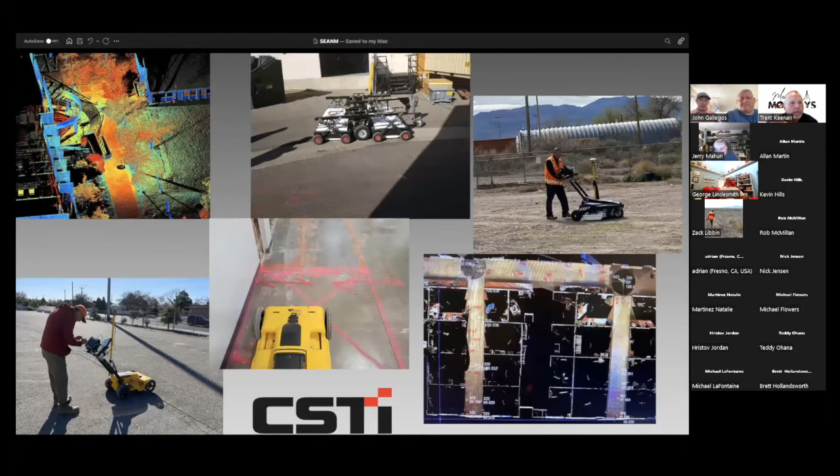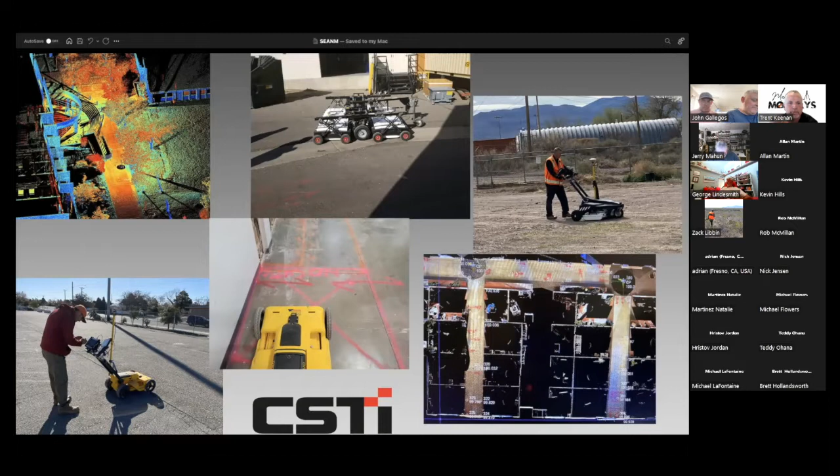Here's a couple of photos to get you warmed up. Some of you may be familiar with some of these tools or scenes. On the top left, we've got a nice LiDAR model. In the middle, our Stream EM GPR, which can be pulled by a vehicle. Then our Stream C on the top right, a nice tool that can get around and cover a lot of area. On the bottom right, a floor flatness scan we did in a building, and in the middle more GPR, with another GPR sensor on the bottom left. So these are some of the tools we use on a daily basis.

Just a brief on CSTI. We've been around since 2007 and started out with a background in construction. John has how many years of construction? Since 1996. I've been with John since 2012, 2013 I should say. With a background in construction and doing a lot of that type of work, it helped prepare us for what was going to come next in our company, which was going to be LiDAR scanning and GPR.

When you have a little bit of experience about how things get installed, it kind of helps you reverse engineer everything and think about how you could provide this information and data in a manner that's going to be beneficial to the end user.

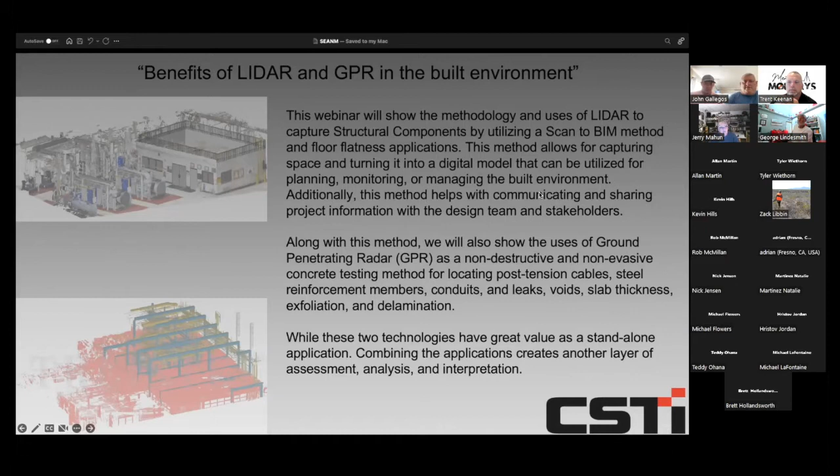Okay, so what is GPR? I'm sure everyone has heard about GPR, and GPR is simply just ground penetrating radar, where we're injecting electromagnetic waves at a specific frequency into the ground. As it creates a return, and the speed of the return, it creates this beautiful bunch of fuzzy looking lines that takes you about 100 years to understand what they mean. There's a lot that goes into GPR as far as conditions and physics, and everything that's far and few between. We could have an entire topic about GPR and what it does.

What I can say about it is it's a specific tool in a process that allows us to analyze specific things and features in the ground, identify what anomalies are supposed to be there and what are not. We take the two, try to marry the information, and then make the assumption of what that object is in the ground.

It gives us a repeatable sense of redundancy in terms of the information, such as looking at the rebar spacing, and then we check the plans and say, okay, yeah, this makes sense that they spaced it evenly this amount. It's used for analysis. It provides a bunch of different applications for a bunch of different things, but specifically we're talking about structural.

Some of the other things that's beautiful about GPR is it helps us look at certain conditions of the concrete. It allows us to see the health of the concrete, whether it's old, whether there's any type of degradation, if there's any type of delamination or exfoliation that happens when the rebar gets water intrusion and starts to rust, causing a chemical reaction.

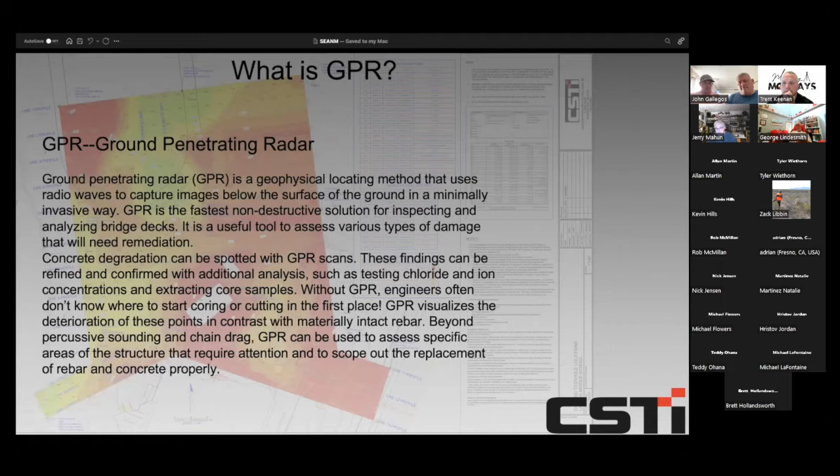Some of the applications in terms of how we apply GPR and the studies that we utilize is concrete inspections. That means anything like the old DOT methods of dragging chains over a bridge deck to see if it makes a hollow sound, or tapping to see if it's hollow, which has a specific pinging sound, or like a CMU wall in a jail.

You want to know which ones are filled, which ones are solid, and you can kind of tell. They're using sound waves, and waves from the hammer, to understand that the pinging is going to have a specific sound.

The old method the DOT used to utilize, or probably still do, is dragging a chain, and when they get a hollow sounding signature back, that's obviously a problem area in the deck. But nothing like GPR is going to give you a more comprehensive picture, even though it takes a lot of dense passes to come up with that type of analysis.

It's a wonderful tool to give you a great view of what's going on, and we'll show that slide here in a second. Again, we talked about degradation, delamination, and of course any under slab voids. A lot of times we've been in situations where there were underwater leaks for long periods of time, and as water goes in the slab with hydraulic pressure, it goes the path of least resistance, so your assumption that it's over there could actually be originating from somewhere else. That helps us narrow it down.

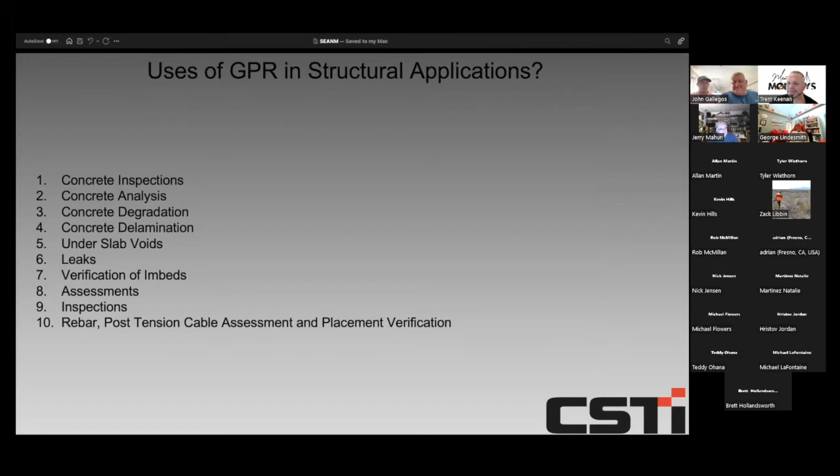Any type of assessment you can think of, a lot of forensics goes into that assessment and inspection. And of course, rebar, post-tension cables, and placement verification is huge, because a lot of times when they're coring, we want to make sure they're not coring through a PT cable that has a 10,000 PSI strand. If it's pulled right, that thing's just going to kick out and cut someone in half. So it's really important to have this tool if you're in the construction industry.

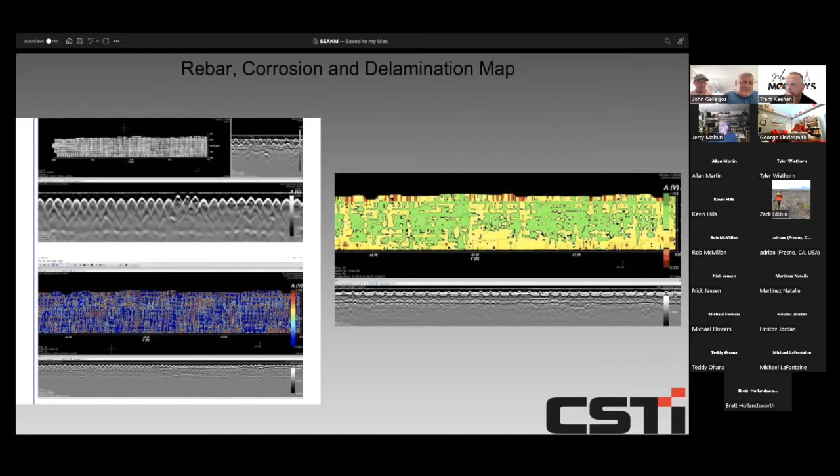The one on the bottom left is just a straight tomography, but you can see the lines of the rebar. When you see bigger signatures with higher red areas in between, that tells you where it's starting to corrode and water is intruding. It's starting to get to the point where it's spreading from rebar to rebar, creating separation because of the chemical reaction with rust - that's exfoliation. That's when the slab starts to split and the rebar mat starts to go.

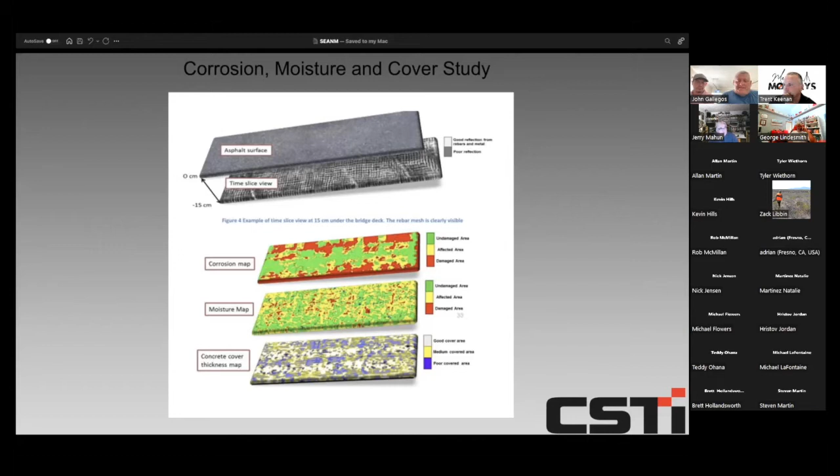So here's another one that we did. I think this is the old NMSU bridge before they knocked it down out there at exit 1. We happened to do this study right after a survey, after it rained the night before. People always ask if rain is the enemy for GPR, and it is, but only when it gets oversaturated. In this case, we had a lot of rain, and it actually gave us better resolution because of the timing.

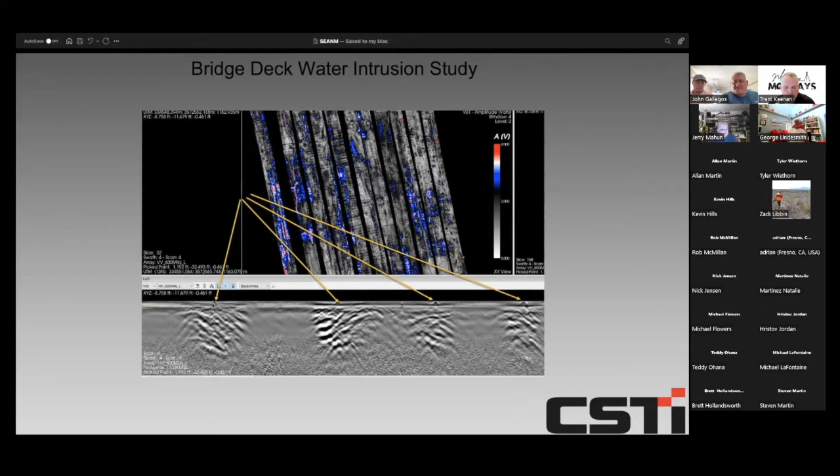Especially in existing buildings or places you don't have great information on, because at the end of the day you're just shooting in the dark. This is a good example - there's no such thing as luck. That guy was just gambling with his life. Thank God they recognized that, and after that day they hired a full-time GPR technician. So that gives you an idea why it's important in a lot of ways.

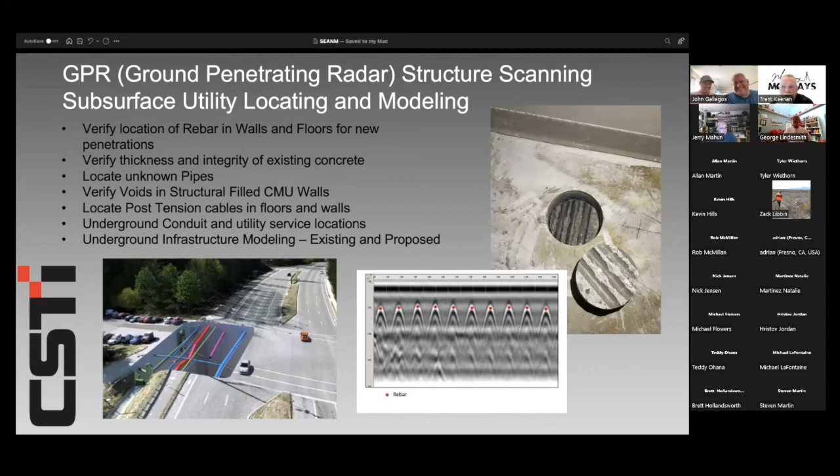Okay, so what is LiDAR? I know most are probably familiar with it, but let me give some background. It's a great technology that's been around a while, but is starting to be more utilized today. In the last 5 years I've really seen it used more and actually requested - sometimes we use it internally to produce deliverables, but sometimes people ask for it specifically, maybe just wanting a point cloud file, which combines all the data collected from a LiDAR data capture.

There's a lot of different applications that we've been using it for so far. Of course, surveying and engineering, doing design surveys, combining data sets with mobile and aerial is a huge value. Looking at evaluation and concepts. Of course, with highways, when you can drive down the road and be collecting all this detailed information, it's a huge benefit. Of course, mines and quarries, being able to scan something and bring it back to the office, which we refer to as virtual surveying. That's pretty awesome too, when you can bring that model into the office and be able to work on it. Looking at the built environment like we're discussing today, and structural applications.

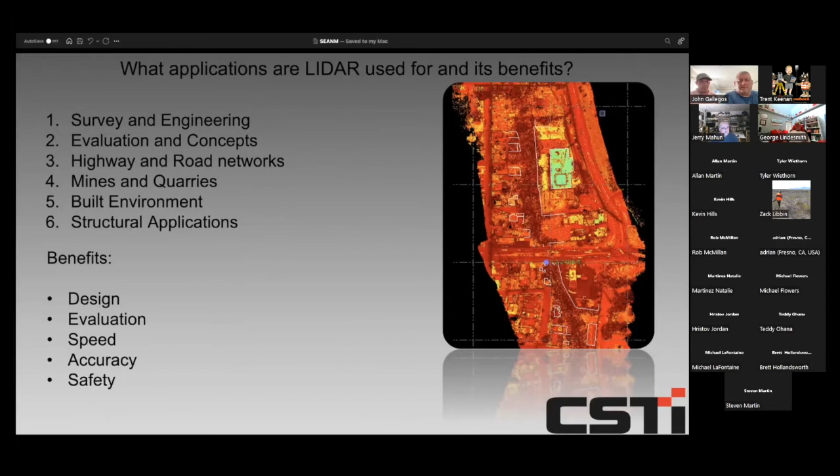Here's a little bit about terrestrial. I'm not working for Trimble, I promise, but the SX10's been pretty awesome, a tool to be able to set up, especially just for an everyday surveyor type scanner, because you can set up on your control and scan away. You don't have to worry about putting up a bunch of targets, and everything comes in really nice.

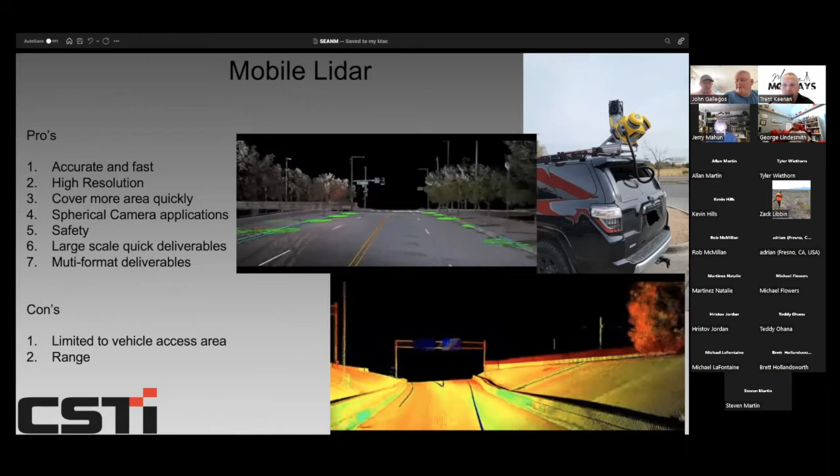Going into mobile LiDAR, like I mentioned, it's nice when you could drive 40, 50 miles down the road and be able to be collecting some tremendous data. Being able to, if you forgot something or the client wanted something additional, they wanted the trees after all, you don't have to go back. It's nice to have that. Even as historical information from a city, being able to archive the information could be very valuable for them. From a safety aspect, I know I played Frogger plenty of times in my day, but definitely not something that I would want to put our team in a situation like that. So we really like the safety benefits that we get from using mobile LiDAR.

Aerial LiDAR, again, you can collect some pretty large data sets with the platforms. One of the benefits of LiDAR is that it's able to penetrate the vegetation, which is very different from photogrammetry, UAV photogrammetry, where your images, your model is going to have the tops of trees and everything, and it's a little harder to classify and clear out. So we lean on the aerial LiDAR to be able to give us a nice surface even through the vegetation. And so it's been a great tool.

But sometimes you can have different restrictions. Maybe you're not able to fly in a certain area, or it takes time to even get those permissions. And it's not something you can always just say, hey, I'm going to schedule that for this Thursday, because there's steps you have to follow in order to do that. And so it takes a little bit more coordination to get to that point.

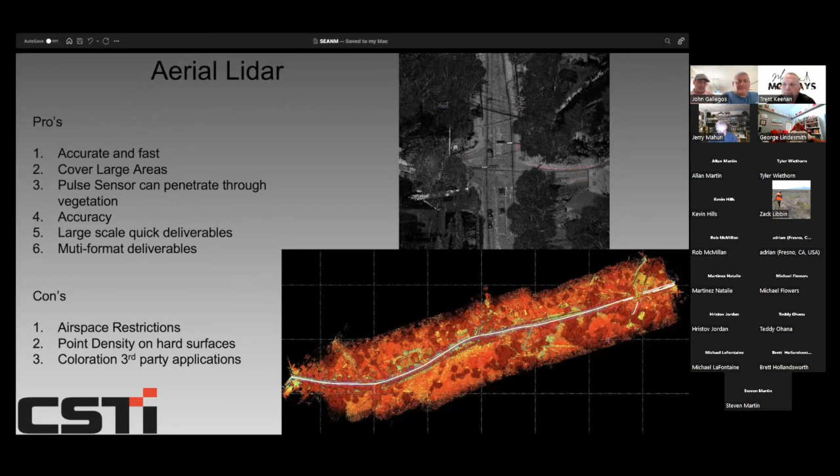And then, looking at some workflows and different software that we're utilizing that I've mentioned, and also different deliverable file types.

So the most important thing is access and planning. Of course, the acquisition - it's always going to be the right tool for the right job. You have to assess it, make sure that you put down your panels and your targets everywhere they need to go.

A lot of times it's a combination of one or all of the acquisition methods that you need to utilize. And important is registration - being able to get all the data sets to meet a quality of relative accuracy in terms of how good that information is fitting, making sure it meets the specification.

Of course, the georeferencing could be placed on whatever the constrained values of the project are, and whatever the criteria is to meet that. And then the next part is extraction and deliverables. At the end of the day, we get to give it to the GIS guys to go out there and put a bunch more data on their website and do more analysis.

So it's probably going to bog down your machine, but hey, that's what they're all about. And then again, some of the registration and trajectory software - some of the best in the game - you guys have probably already seen. The extraction, I know there's a ton of them out there. These are the ones that we use.

And it's not a function of just one - you have to use a combination of multiple ones, because each one has specific tasks, being able to look through information.

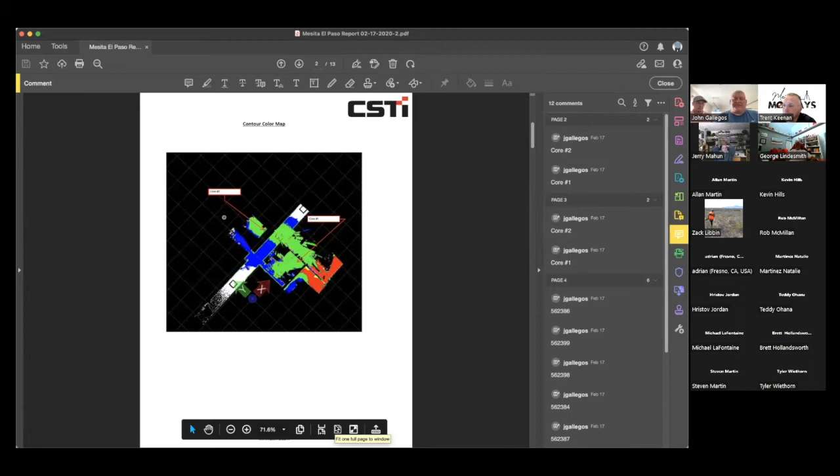And of course, we'll get to the cross sections later, but this gives an idea of a telltale - okay, this is where I need to cut my sections. It gives me an idea of where it is on the floor plan, so that we can go through and create the reports, so the structural engineer has an idea of what's going on.

So on a plane deviation map, the bluer the color, the higher it sits below, and the red colors, it's going to sit above the plane. So there's quite a bit of difference, about 3 inches, anywhere from 0 to 3 inches when you get to that point. And I'll get into the cross section.

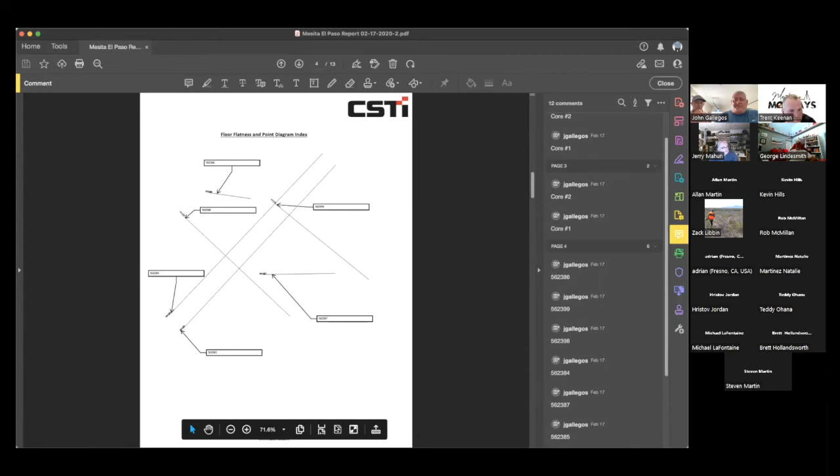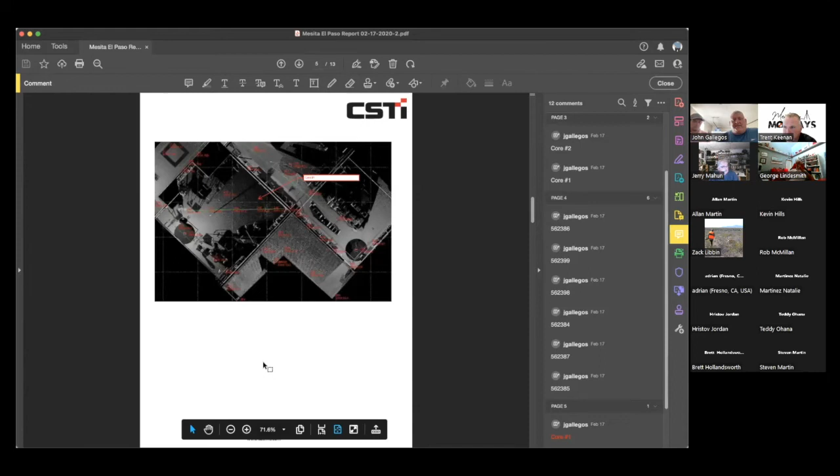This is more of a diagram of where we cut the sections and did the GPR, but we're using the analysis tools in TopoDot to come up with this diagram. These are the random points we sample, where we try to create redundancy by extracting the actual points themselves. You can see some elevations in there that give us a data set where we're taking hard measurements to make sure we're getting these cross sections, and that's how we're able to tell from the model we're extracting the cross sections when we do the analysis and the FF and FL reports.

So when we get into those cross sections, you can see that those cross sections are on the floor. On the left side, it gives you an index of 0, and the floor is heaving as much as 2.5 inches over a distance of 90 feet. As you get to the bottom, it's kind of doing the same. So that's identifying to him that it's heaving in a specific spot, so he knows it's problematic. And obviously the structure is a living and breathing thing, so it's doing some things because there are things that are not supposed to be there.

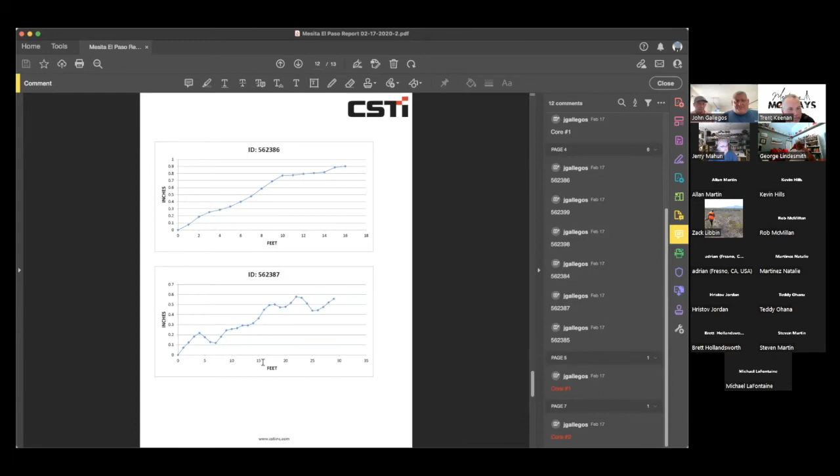So as we get more and more, we have some stuff that goes from 0 to 1 inch. Again, on the bottom, 0 to 1/2 inch. And then we have some that really get kind of wacky in there.

At the end of the day, this gave them a pretty good analysis of what was going on in the building. So it allows them to apply a fix to the certain condition, because the survey was giving him signs of what was going on in the building, and it gave it to him in a geospatial position where he could actually go over there and say, okay, here's what it is, here's the plans. He modeled it, was able to come up with the fix, and they found what the problem was. It was just an underground leak, so they had to apply the fix so they can remediate the issue, and then it can no longer create an issue for the lifespan of the structure.

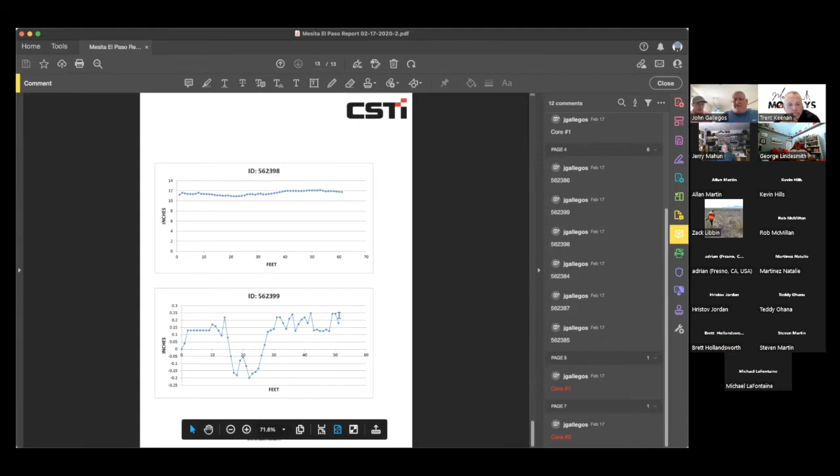And then also as a baseline, a lot of times we've got to be patient, we've got to start somewhere. Like just the other day, we did a laser scan of a CT scan room, and we were thinking that maybe the CT scan machine itself was too heavy for the floor. So we were going to run a floor flatness report on that, and then also go back in 6 months to do a comparison on any movement, like John mentioned, it's kind of a living, moving thing. So we're just trying to monitor that.

So the next thing we're getting into is scan to BIM. I know a lot of you understand what that means, but essentially we are going out there and doing a capture of the existing condition, and we're going to model it. The coin term they come up with now is we're creating a digital twin of the existing condition. And it's very important because it's up to us to be able to visualize and make these assumptions of what the structure is, what type of frames, what type of material.

There's so much metadata and so many things that can go into the development of these families, and the Revit model and families are just basically the templates, and everything applied to that has a ton of information, and those could be specific to a client. They could have a Revit template they want you to model it to, or there are some other things they utilize. It's just a matter of being able to identify what those are before you capture the survey.

Now, we pride ourselves on being able to put this in a geospatially accurate condition, because a lot of times the software kind of limits us to putting it in its own local software, so there's not the ability for us to create a condition as it was originally surveyed, which is the foundation of the design.

So we're able to overlay all those elements using the same coordinate system. It's a beautiful marriage when you can get them all on the same coordinate system that the survey initially established. It also allows other consultants to get on that same coordinate and control system, so they can overlay all this stuff to do analysis and anything they need. For stuff that might come down the road, at least we have one common system we're working off of, just trying to be a little proactive as far as that goes.

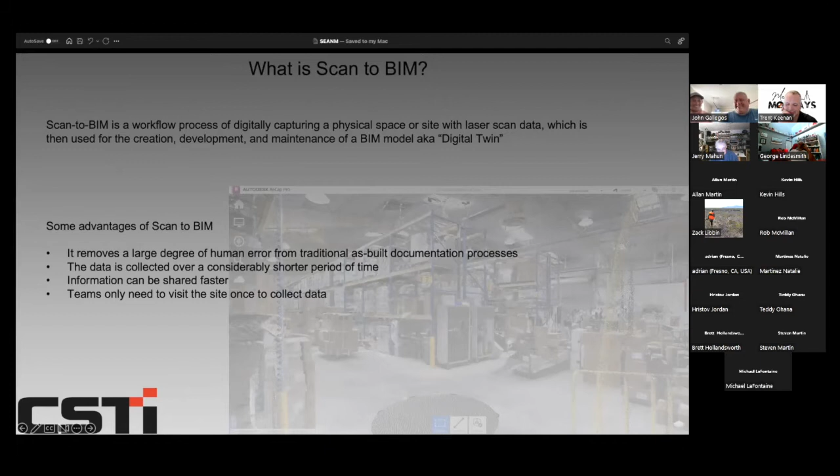And for anybody who's familiar with the BIM process, I'll let Dave take that over.

BIM stands for Building Information Modeling. Basically it's a tool that helps manage this whole process from design and planning, construction, and operations and maintenance. But it's a process that even in the initial design stages can be pretty valuable. Being able to translate a 3D plan onto a 2D piece of paper is always challenging for the contractors and those building it—interpreting that in a 2D world is very tough and can be very difficult.

So with BIM, we're actually able to look at a model of something. When things are designed and planned, that's one thing, but it could be built a whole different way—there may be changes, there's going to be addendums and change orders and things that happen. Through BIM, you're able to track all of this that's happening.

What's cool is there's something called BIM coordination. A BIM coordinator can work with all the subcontractors to make sure everything's being done in orderly fashion—so that a maintenance box won't be covered up by a water line, let's say, or some other utility, ensuring there's handhold space for that to occur. Sometimes we see those memes where somebody's trying to open an electric cabinet and can't because there's a curb in the way—it's just like these engineering faults. This helps minimize that.

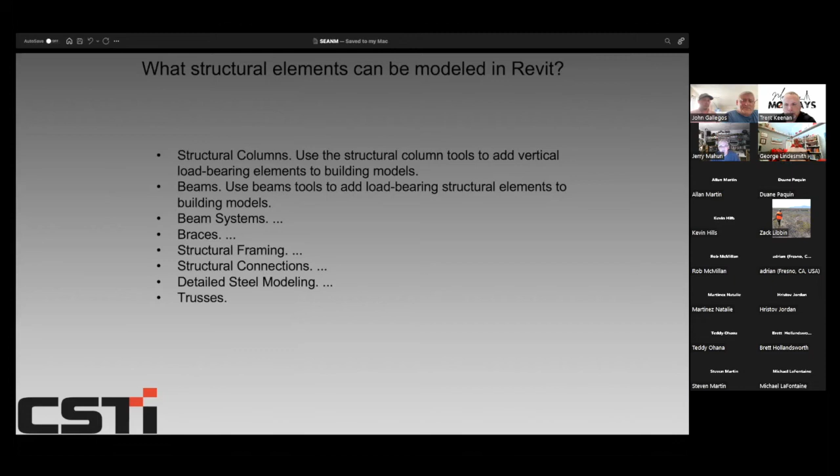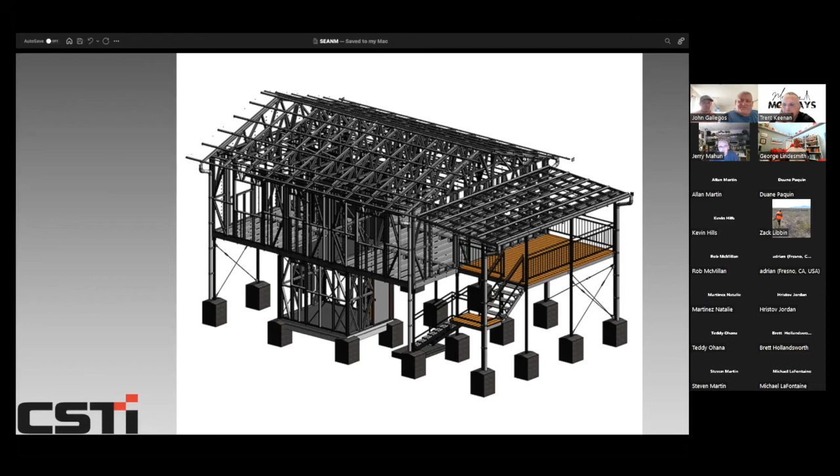So the structural engineer can make informed decisions, because in this specific case, they wanted to put heating and cooling units on the top, and they needed to make sure the moment frames were able to handle the load. So we had to get all these little details and model this to help in his decision.

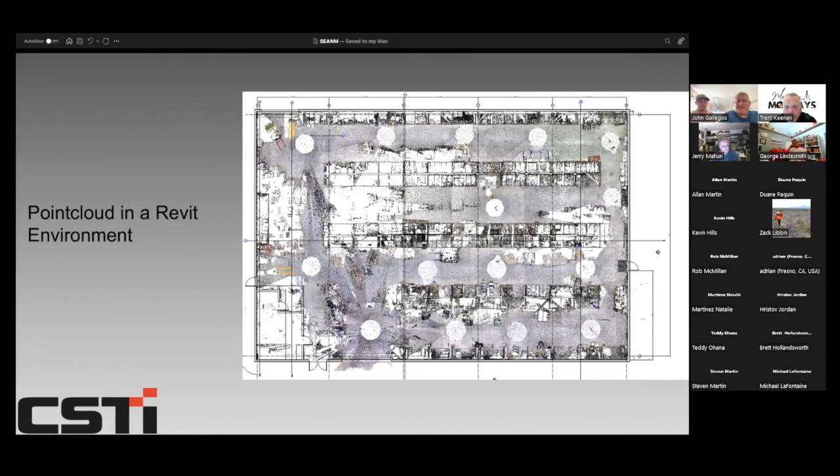He was able to even model all the other components, which were the structural bins, and know where that space is, because it's totally about utilizing the space and understanding what was there. The better information you have, the less assumptions you have to make.

It's not just eyeing it and going back to some field notes that could have been off plus or minus whatever. But at the end of the day, this is kind of what the finished product looks like when you know it's coming together as it should.

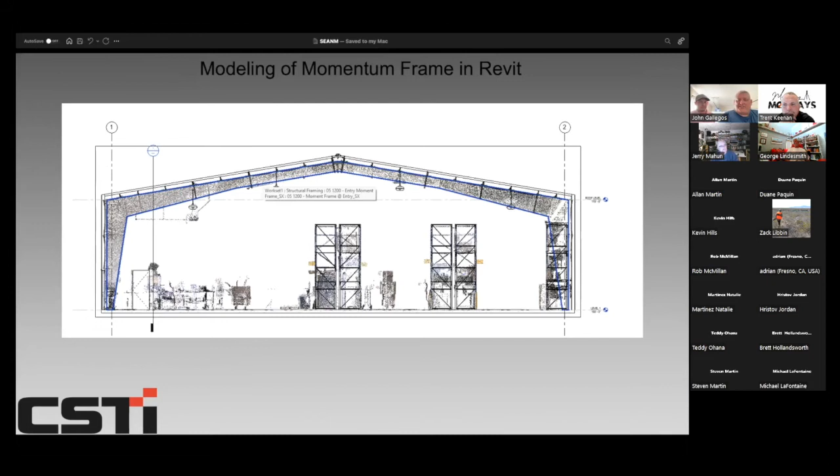On that one, what do you think the total man hours spent in the field and office was for what you put together there? 40 man hours to build the model, the digital twin, and probably a day in the field. So probably about a total of 50.

How much of the Revit side of it is automated? It's pretty automated. You just got to make sure that you have the right templates, and the architect or the engineer gives you the right information, and it gets put together pretty quickly. Once you have that established, it's just a matter of picking through the model and clicking, and it kind of is really automated.

We have an associate, his name's John as well, John Dillinger, and we wanted to see if he could join us today to add some of this because he really specializes in creating these models. So maybe for future Mentoring Mondays. He's totally knowledgeable. What's cool is that he's straddled the architectural world and the survey world, so he knows the best of both.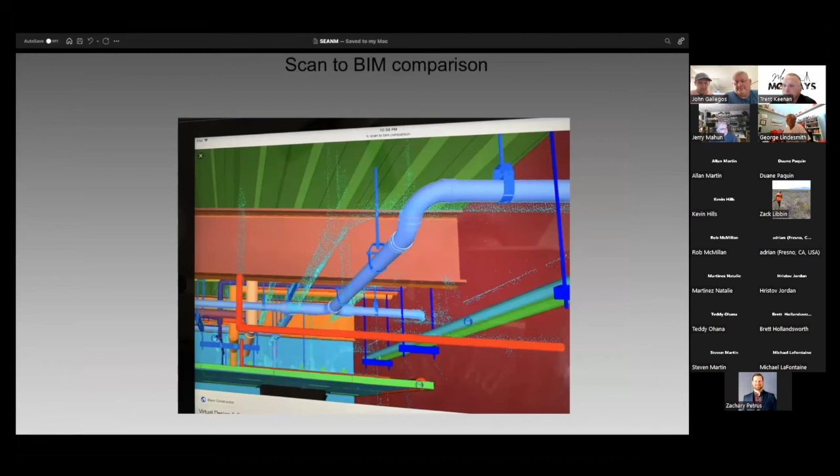So it's a nice little direct comparison tool that you can use. And then I think this was one of the last things, this steel report. Just give us a sec to set it up.

The one thing we never lose sight of is that we have to start thinking about how we're going to represent the information, even though we may not actively be doing it right now. We have a voice into how that information has to be represented in the next generation. We've got to set up the tools so they can follow in the footsteps of that information.

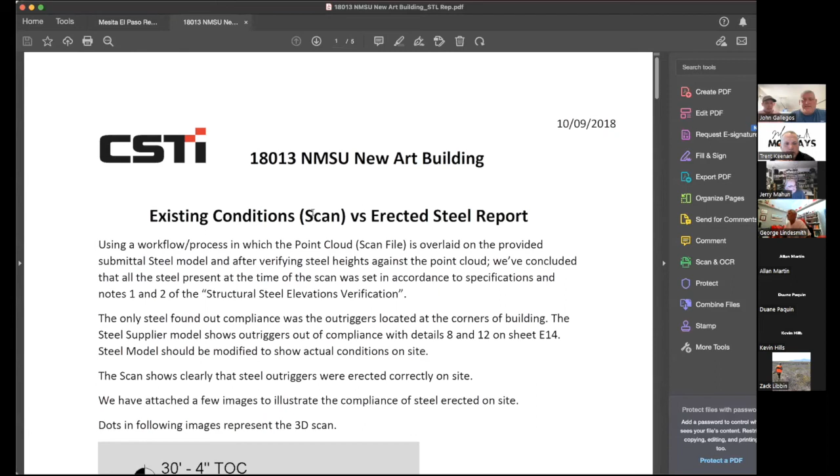So here's a report, this is a beam erection report, just letting us know what the build versus the scan looks like. And I'll let David go through the report.

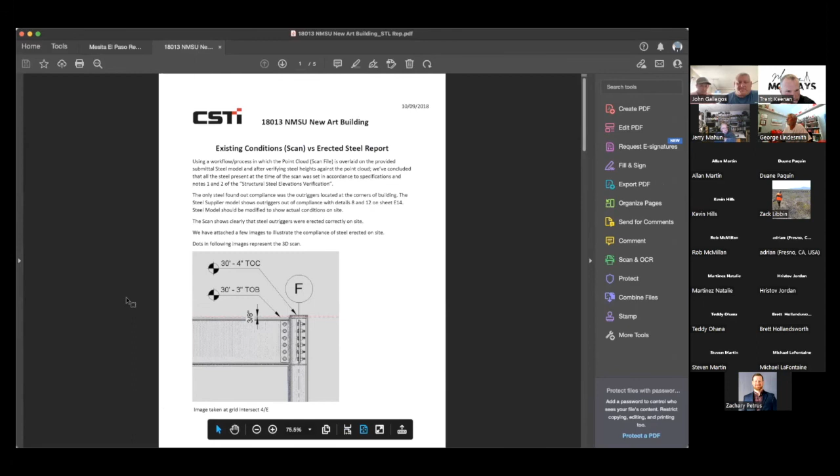Yeah, so this was over at NMSU, and part of the spec called for verifying once the steel was fully erected to do some verification and compare it against the steel structure model. So here's some direct comparisons that were made.

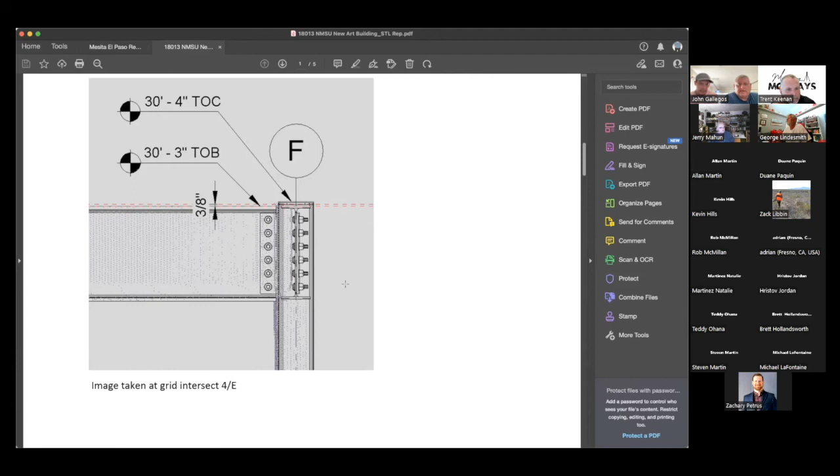This is a really nice report that was put together, but you could see the point cloud dots inside there, and then you can see how they're compared right to that model. So just by looking at it, that one in particular looks like it's pretty good.

Again, like John mentioned, the georeferencing, that was the power in this. Victor, the guy that made this report, he was able to just basically import this data directly into the model, and it was set up. He didn't have to do any scaling, any stretching, any moving, or anything like that.

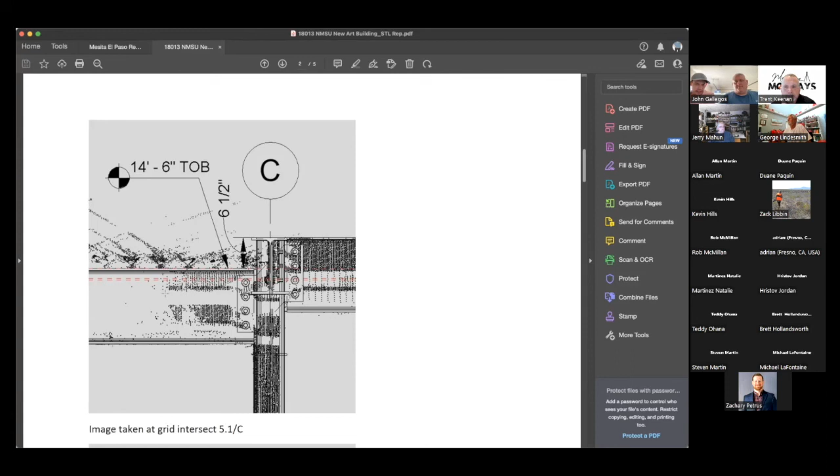The thing is, you get a lot of people who get a scan model and they do the best fit scenario, right? They're like, oh, I'm going to fit it to the best the way that the condition is. This is not the way it was done.

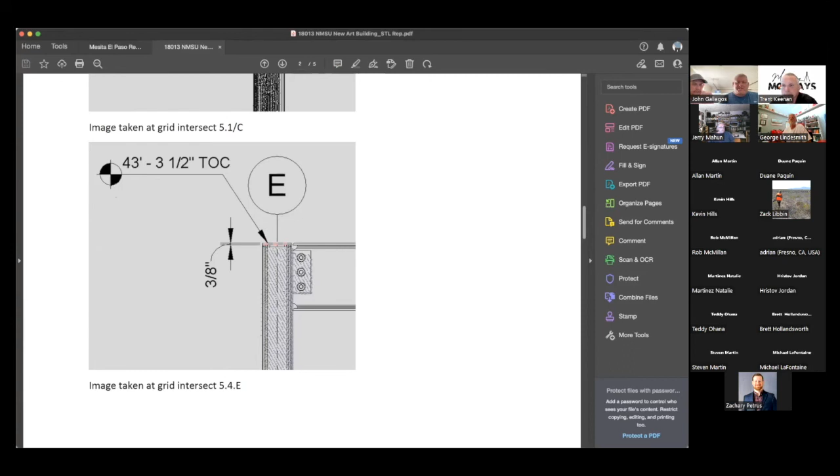We were controlling, we did the design survey, we did the layout, so it was independently tied to the control system, and it was a one-to-one comparison, as opposed to somebody randomly going in there to check it for analysis. It's really not a true representation of that measurement, because you're only applying the condition to the best fit scenario.

So yeah, it's a nice report. Here's an example of something that was incorrect. It says the outrigger is shown clearly in the wrong place. So just by doing that direct comparison, boom, there it is. And so we can report this back to the contractor to go make any changes or any fixes.

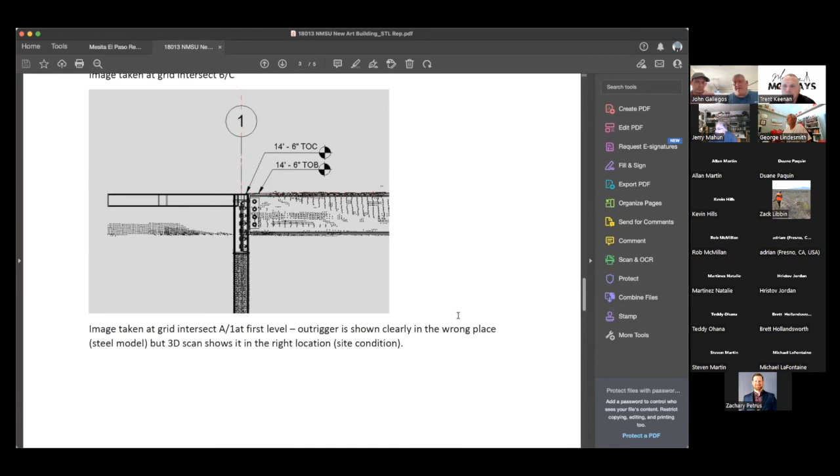And they can apply the fix before the next consultant gets in there and starts to do something, so it's not holding up the job. That's why this is a project saving tool. And again, there's some more references of some things that were inconsistent with the structural model. So it's just a cool comparison.

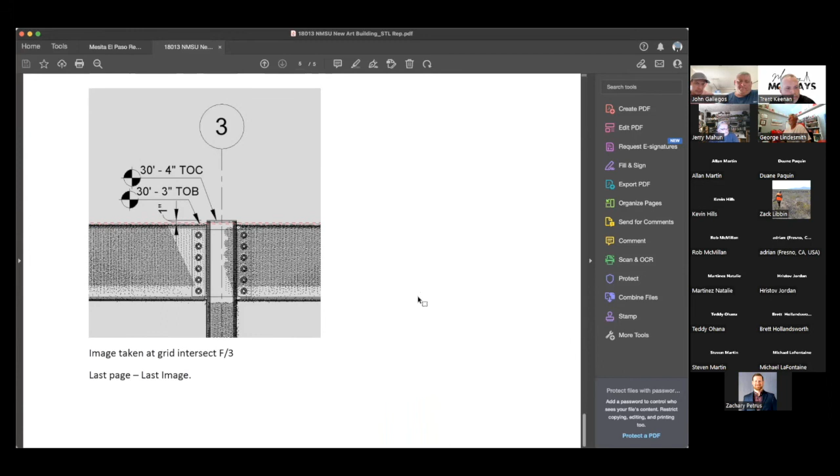I always like this one just because it's a really nice direct way to see how the two could be put together and represented. And like John said, how is this information represented? In a report like that, it comes out looking really nice.

So that concludes our presentation there. I know we've had a few questions. If anybody has any other questions, we can answer those now.

Thank you. I like what you guys said about putting together a group, a team to go over this stuff, because it's really important. The largest construction companies are already doing this type of thing, getting into virtual design and construction, right? So I'll put a link in here, just so Trent, you like the links, so I can follow up with this one.

This company, this coalition, is a bunch of construction companies that are the largest in the country, and they've done the same thing, put together a coalition to go over these issues, and they're struggling. I listened to a couple of their seminars and webinars, and they don't have surveyors involved, and they think they can do all this stuff, but they don't know why they're having problems. Most of it is because they don't have surveyors involved in coordination and putting this stuff together.